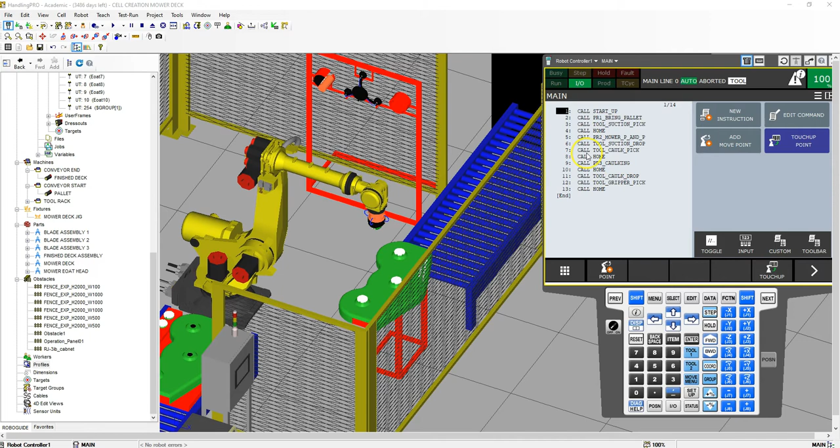So far we've called a multitude of different programs. If you missed any of these, refer back to video 7 and video 6 with the programming. Now what we have is the gripper, and we have to pick up the pulley assemblies and place them onto the already caulked mower deck.

The first thing we need to do is set up some position registers so we can pick 1, 2, 3, and also all these other items. So let's go to data, then position register. We're going to find position registers in the 20s since we're already using a good portion of things. So let's find, say, 22.

This is going to be our blade 1 pickup. So we just go enter and call all these what they are, then come back and set them. We'll call this one blade 1 pick, and this one blade 2 pick. Those are our pickups, and then number 25 is going to be our drops. So blade 1 drop, blade 2 drop.

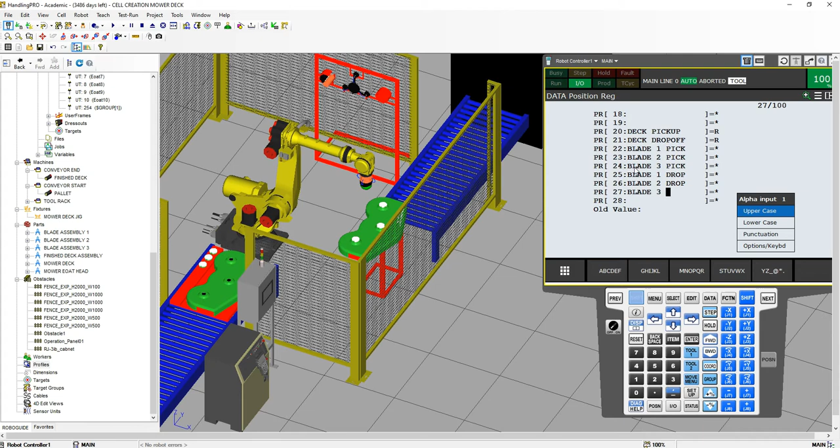Shift record. Now that we have those 3 positions recorded, let's go to the fixture, double click that, make sure you're under parts, click blade assembly number 1, move 2, and record that. Then I'm going to go to blade number 2, move 2, shift record, and blade 3.

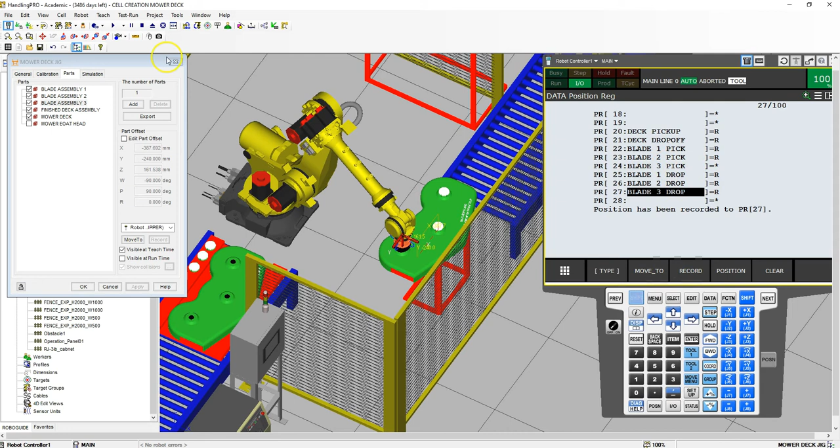Shift record. Now that we have those 3 recorded, we need to go back to this one and record that number 3 pickup because it did not register. There we go. So now we have all 3 of those positions set up in the register.

So let's go to select and create a new program, and this is going to be our program number 4. Call this pick and place, P and P. Now, because we're moving, we do have to have motion groups. So let's just go into this, enter, enter. The first thing we need to do is make sure that we are in the correct U tool.

Let's go new instruction, offset frames, U tool number 4, which is our gripper, the end of arm tool. And then let's add our frame right away, which is number 1. And then let's make sure our offsets are correct as well.

So we just edit command, and we'll insert, say, 20 lines: registers equal to position register ij, 3, which is our tool offset, 1, and a constant of 0. Register equal to ij, 3, the y component we're going to set as 0. New instruction, registers equal to position register ij, position register 3, the z component, and we're going to set this equal to 200.

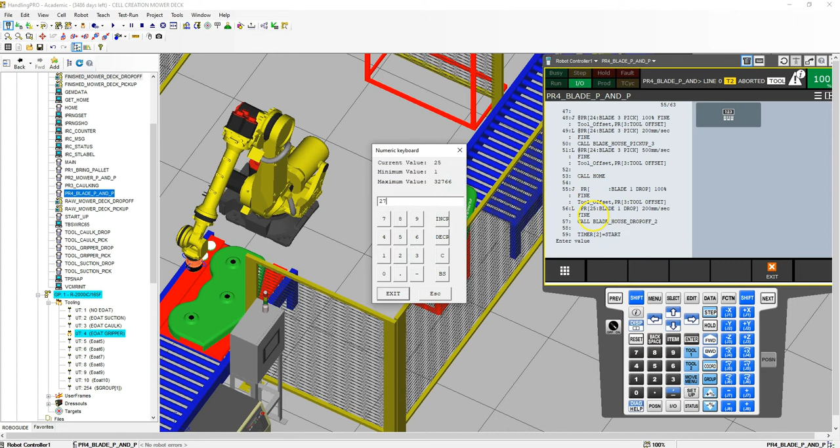Go, and then pickup 3, and this is going to be 24. Pickup 3, 24, 24. We need blade housing number 3. 27, which is drop off number, and we're dropping off number 3. There we go.

So now we have our pickup and placement for our blades. Okay, so the next thing we need to do is make sure that the timers are correct as well.

So we have timer 2 starting at the top, then going down, which is part number 2. Okay, pickup number 2. We want to switch this to timer 3 because we want to have all those different timers.

So timer 3, and then timer 4 for pickup number 3. Because each one of these should have a separate timer, since they're going to be picked up and placed at separate times. So they're going to have shorter and shorter times as they're picked up and placed.

Okay, so once we have that blade pickup and placement, then what we're going to do is switch from our tool. So let's add this to our main program: call program, and let's go to blade pickup.

Okay, from the blade pickup, we're going to just call the home, so we're out of the way, making sure we're not running into anything. So let's call home. From home, we're going to drop off our gripper. Gripper drop, so we're going to drop off our gripper.

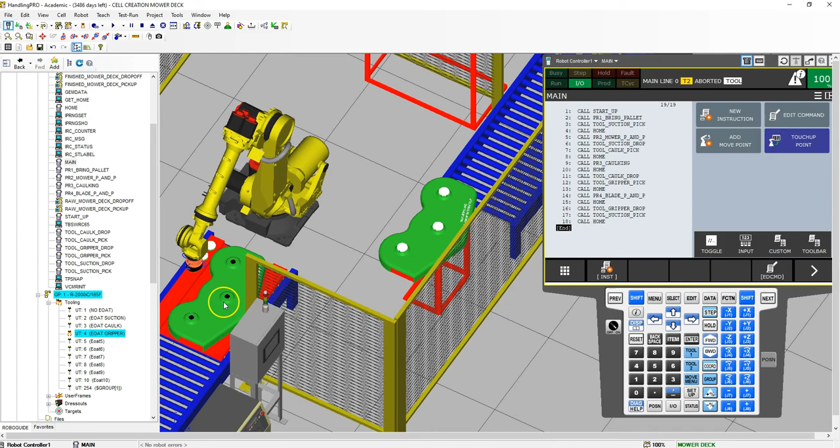Then we're going to grab this suction pickup. From the suction pickup, we're going to call to home, and then we are going to pick up our finished deck, which we have to create the program for. So let's see this in action so far, and make sure everything is good.

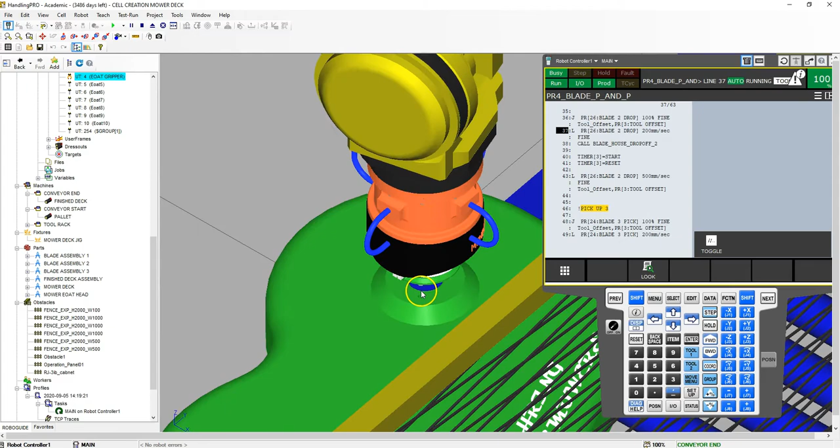All right, so now let's do the final pickup. Let's go in here, select, let's create, and this is going to be our program number 5. And we'll call this finish deck.

So finish deck. Inside here, let's make sure the utool number is correct, which is utool number 2. And let's also, while we're here, set up to make sure the frame is correct. We're just using the same frame throughout, so we're going to use our U frame number 1.

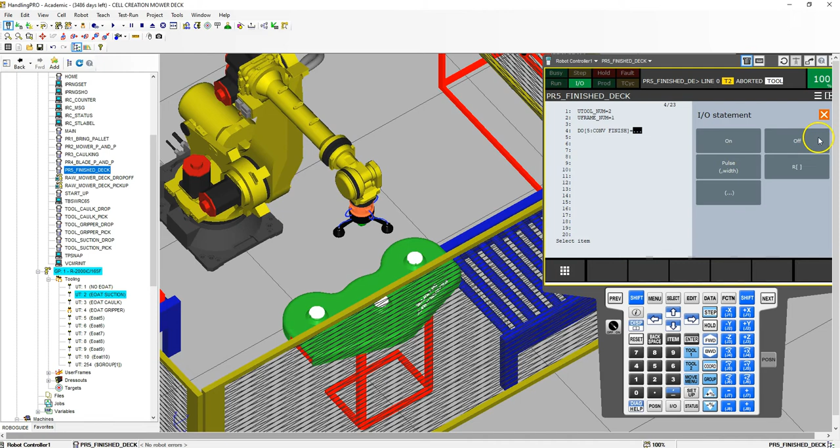Bunch of lines. And then let's make sure that our conveyor belt is also in the correct position, even though it should be, but just to make sure. So we're going to new instruction, in and out, digital out number 5, and we're going to make sure that that is off.

Okay, so if we run this, you'll be able to see nothing is actually going to happen. It's actually inside there, so digital is off. Now we're not too worried about this actually waiting until that happens, just because we know that it's there.

So we're going to go inside here. Let's add our registers now. We're going to set equal to position register number 3, and we're going to set the X component equal to 0.

Then new instruction, registers equal to position register IJ 3 2, which is our Y component. We're going to set that equal to 0.

New instruction, registers equal to IJ 3, which is our tool Z component, which is 3, and we're going to make that 500. So now that we have that as 500, what we're going to do is jog down to this position to pick up our final mower deck.

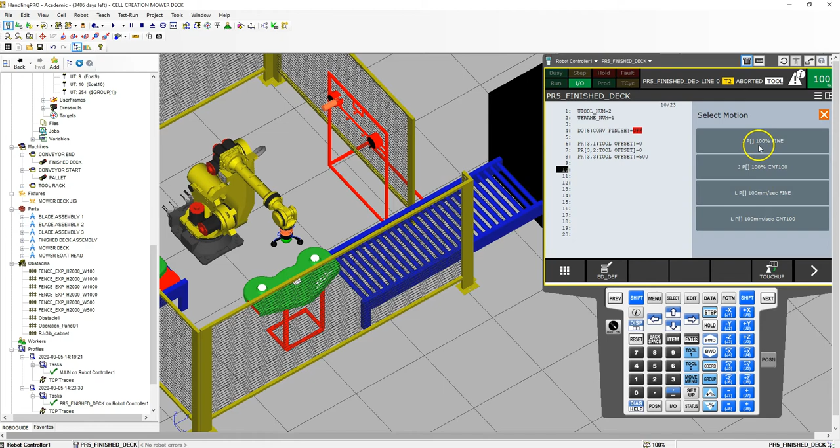So we're going to go add move point, and we're going to joint down to position, and we don't know that position right now because we are not at that position. So we need to go to this position and put this into our registers.

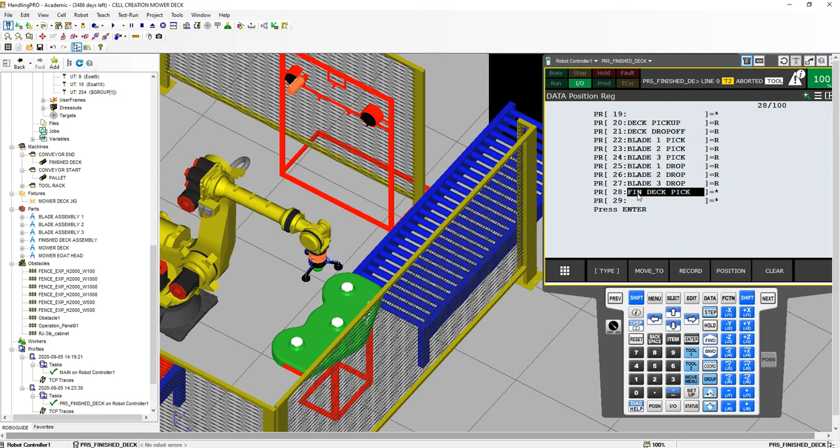Okay, so I'm going to go to data, and we are going to call this the next point right here, which is 28. So I'm going to go inside here, and 28 is going to be the finish deck pickup. So I'll just go fin deck pick. And then we're going to call 29 fin deck drop.

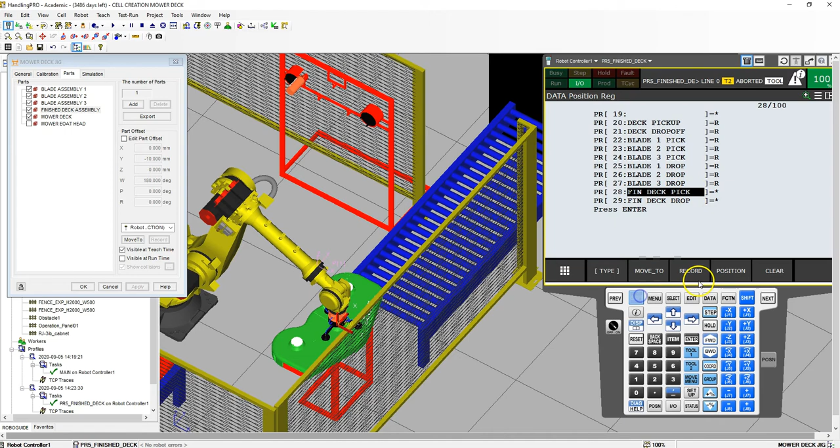All right, so let's go down to this position. So I'm going to go the actual fixture, finish mower deck assembly, move to. Once we move to it, go to where finish deck pick, shift record. Now that position's recorded. Now for the actual mower deck drop off, we need to go to that conveyor belt.

So conveyor end, finish deck. Let's go inside there, and let's go to motion, and let's bring this to the beginning. Test. So now we're at the beginning.

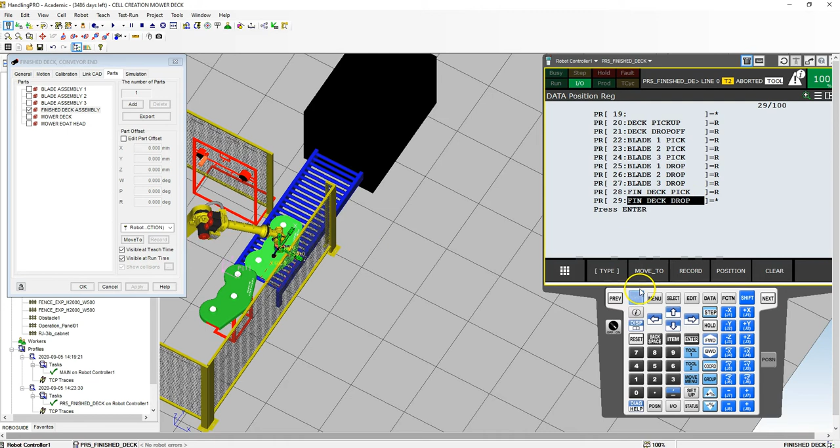Now go to the parts, finish mower deck assembly, move to. So now we're at that position. So go finish mower deck drop off, shift record. So now that we're at that position, we can go back to that program.

So let's go back to the program, go inside here, go choice, position register number 28, which is the pickup, and we're going to have that tool offset 3. Then we're going to linear down to that position. We're linear down at 200, position register 28, and we're going to go down there with no offsets.

Then we're going to call for our mower deck pickup. Call program, and we're going to finish mower deck pickup. And at this point, we want to stop those timers because we want to know the time from when we place it to the time we pick up the finished mower deck.

Okay, so let's go new instruction, miscellaneous, timer, and we're using timer 1, 2, 3, and 4. So timer 1, stop. New instruction, miscellaneous, timer 2, stop. New instruction, miscellaneous, timer 3, stop. New instruction, miscellaneous, timer 4, stop.

So we're stopping those timers, and then we're moving up. So we're going linear up, at we'll say 500 millimeters per second. And we're going to position register 28, and we're going to add that tool offset.

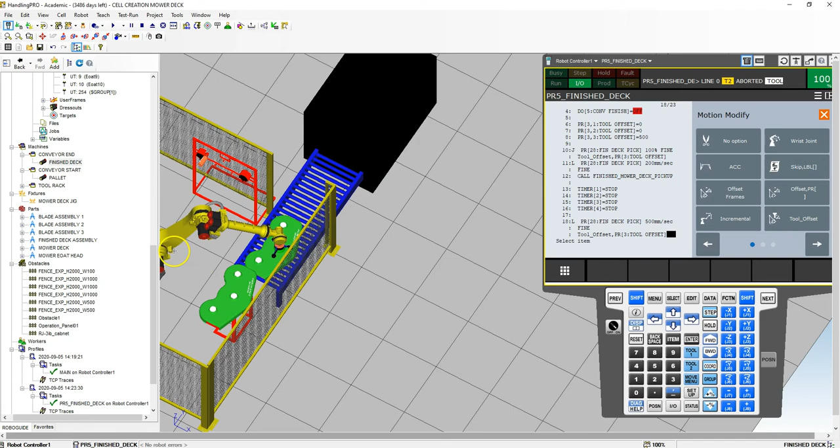Now we're going to move over to this position over here, and then we will drop it off. So I'm going to arrow down. Here's my drop off. So I'm going to joint movement over to position 29, which is our position register 29, our finished deck drop off.

And we're going to do that with the tool offset. Tool offset, position register number 3. Then we're going to linear down to that conveyor belt at, we'll say, 200 millimeters per second. And let's make that position register 29. Then we are going to drop off that conveyor.

But first, before we drop it off, we have to make sure that that conveyor is actually there. So let me add a few more lines of code here. And so we're going to go to our digital output, and 5 was our conveyor start. Oh, we need conveyor number 6. Nope. Let's figure out which conveyor it actually is. So I'm going to just go in and out. And we want our conveyor 5.

We called it finished. That's probably why we're making the mistake here. So it's technically not finish, it's the end conveyor, so raw and finish. So I just was making a little mistake there. So I'm going to just go back to edit. We were right on number 5. So when it is on, we're going to be at that position. So on means we're at that position, and we're going to wait until we're at that position, which is number 9.

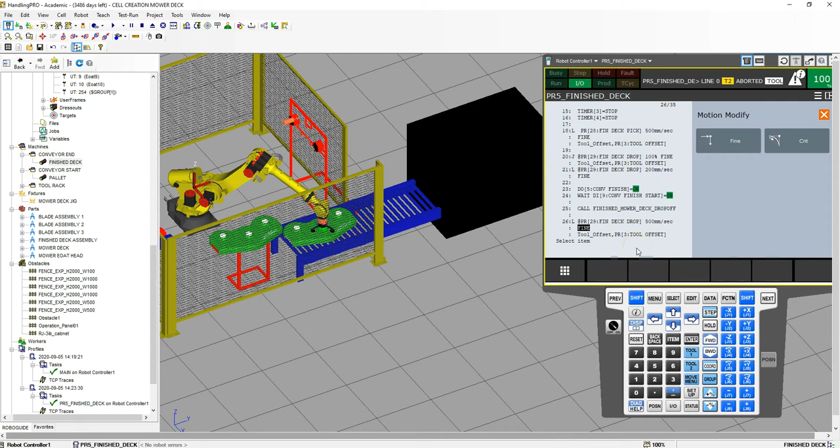So we're going to new instruction, and we're going to call our program drop off. So finish mower deck drop off. So once we're at finish mower deck drop off, we can linear up then. Position register 29 with our tool offset 3. And we can come up at a decent speed. 500 is good. Okay, so we are good with that point. We should be able to run this and see what it looks like.

Let's add this to our main program. Add call, and it's going to be our number 5, which is our finished deck. So we have our finished deck now. And then let's do our conveyor belt. Go to select, create, and this is going to be PR6, and it's going to be finish conveyor. And we're going to leave our group mask as 1 because we're going to have a motion inside here. So let's just go enter.

And let's go new instruction. And we're going to make sure that we are in the correct tool frame first. So offset frames, tool, and we are going to use tool number 2, which is our suction head. And then let's go new instruction, digital output number 5, which is our conveyor belt, and we're going to go off, which means it's moving to the end. Then while this is off and moving to the end, we're going to add move point joint to the home position. So position register 1, which is home.

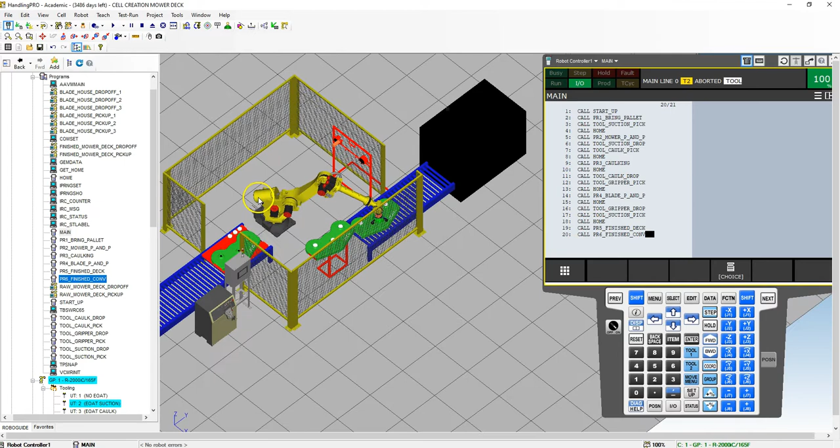Then we are going to wait until our digital in number 10, which is conveyor finish end, is on. Then it's going to exit the program. So let's go to select, and let's move up to main, enter, and let's go new instruction, call program, and our finished conveyor is the last program that we're going to call. So now that we have that finished conveyor, let's run this. Let's check out what the timers look like, and then we can modify the timers in order for this to work.

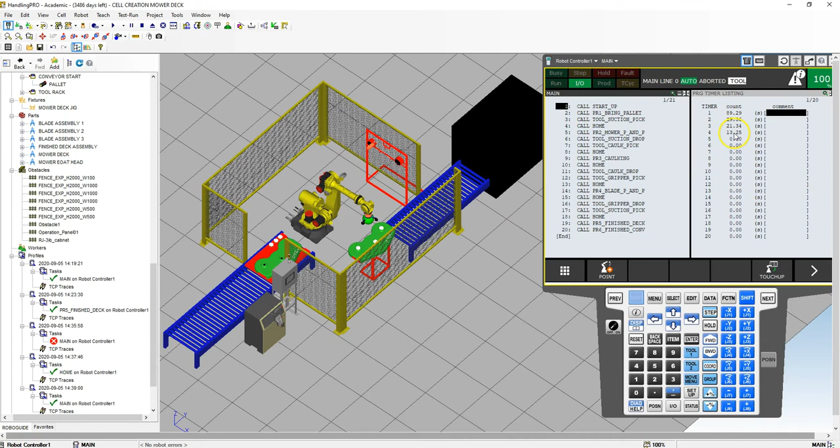All right, you can see how those didn't disappear there, and this is where the times come into play. So now you have to make sure that these numbers, so for a simulation, if I go to the mower deck here, the mower deck needs to be about 89.29 seconds. Again, this is the starting point, so you may have to tweak this a couple times in order to get to that position. Apply.

And then we have blade assembly number 1, which is going to be 29.36. Apply. Blade number 2 is going to be 21.34. Apply. And blade number 3 is going to be 13.25. Apply. And again, this is a starting point. This will get you really close, and you may have to tweak this maybe a half a second or a few seconds.

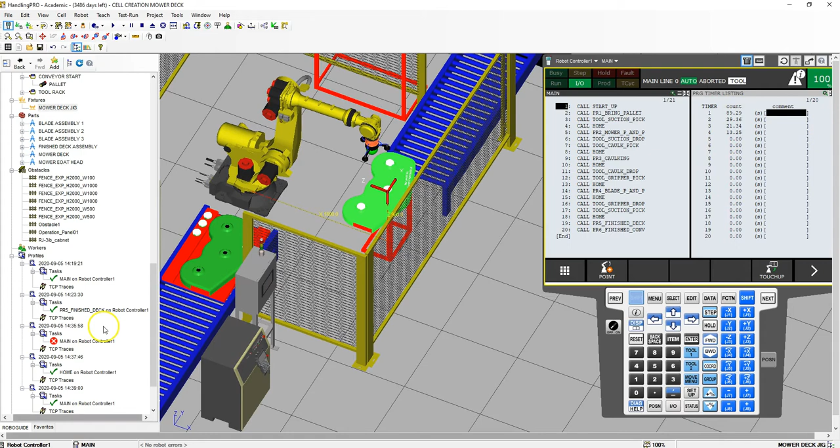And then you can run it, and then you're able to run through each time over and over again. And now you can just loop this program over and over again, making it a smart program. So that is the mower cell.